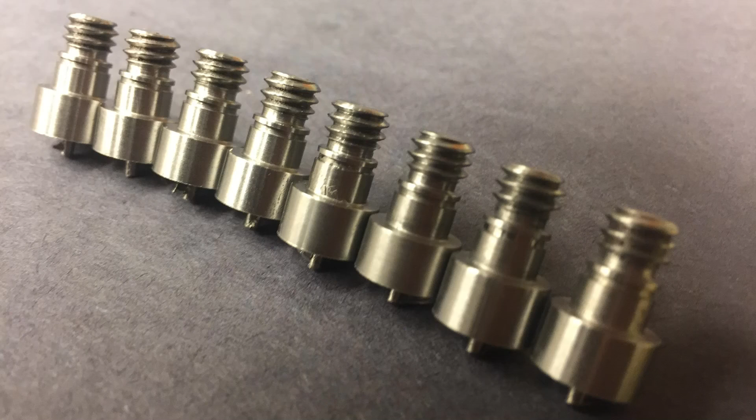So this is where we left off on the first video. Now we'll mill the slot and trim the head of the screw to length in the mill. Okay, we're going to use a collet chuck like this one, and we're going to put it in the vise here. I'm going to use a 1/4 inch collet to hold the part. It's a little bit hard to get these things in here.

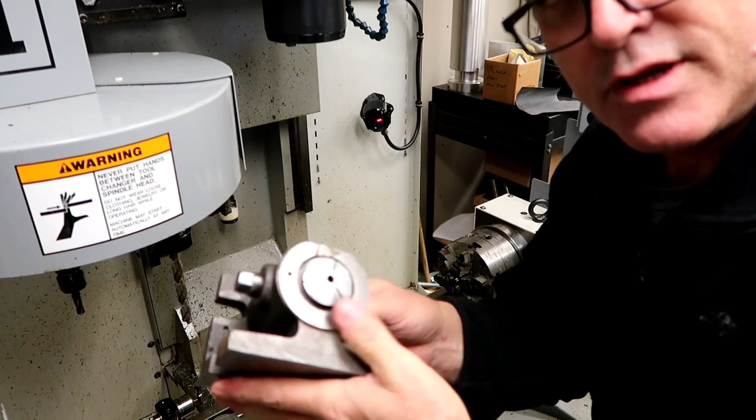This is what they call a dead length collet chuck. The collet doesn't actually get pulled back in this kind of chuck. I got to get a wrench that fits that, but the back of the collet chuck pushes forward, so the collet never changes its location. A normal collet chuck, like what I just used in the lathe, actually pulls the collet back to tighten it. This one actually pushes forward, so the collet doesn't move.

The inside sleeve moves to close the collet, which is kind of nicer because then the part doesn't shift back and forth due to diameter changes. Because if the diameter changes in a regular collet, and it pulls back further in the taper, it moves the collet in an axial direction. This can cause problems with the length of a part, or the shoulder or whatever it makes up on. So that's what we're going to use.

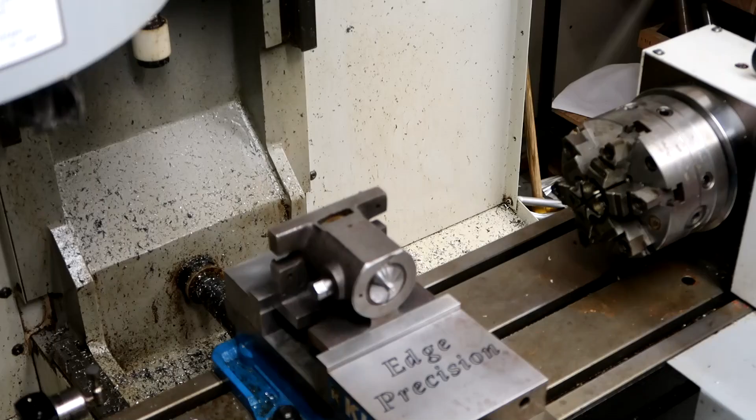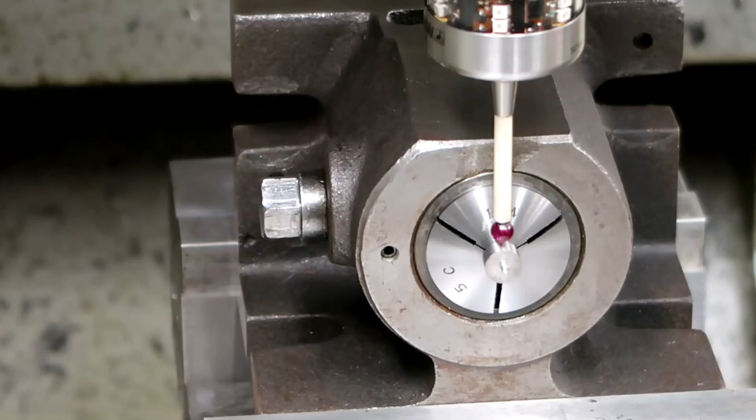We're going to stick it in the vise on parallels. I got to get the parallels out. Okay, we have the collet chuck in the vise on parallels, tapped down. Now we got to establish the part 0 of the part. We're going to probe the X and the Y and the Z for our fixture offset here on the machine. So I already got the program made here in the MDI.

Let's see how this works here. So first we're going to do the X axis. Let's start. Okay, now we got to jog it. Jog it down in Z a little bit so I can get the Y. Go Y, it should go to the plus side with this, if I did everything right. Okay, we gotta jog it back up for the Z here. Make sure it's on center line.

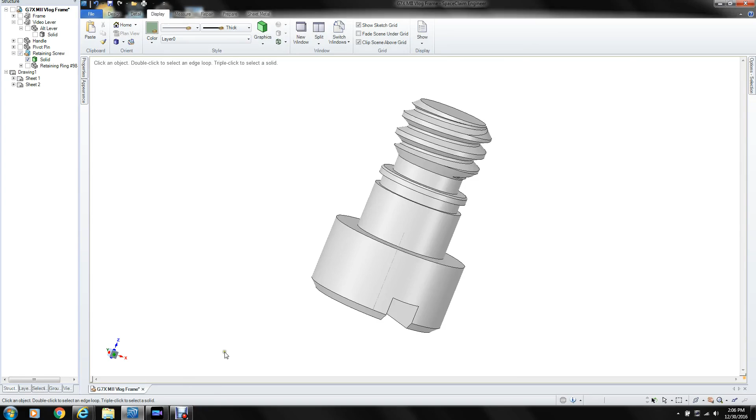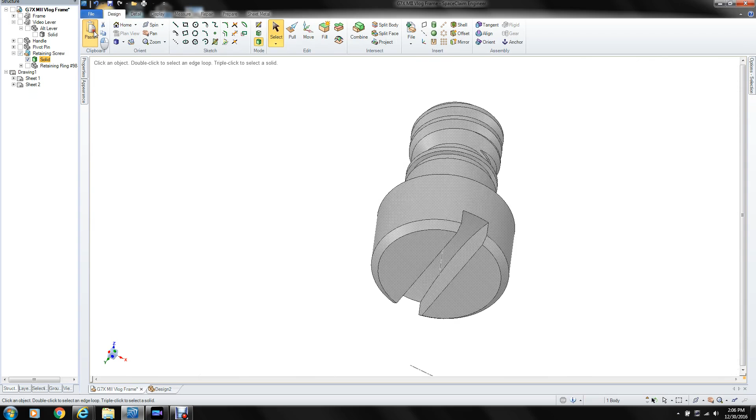Now we've got to go through actually making this little program to face the screw off and to cut the slot through it in this case. So first we got to get this in a position. We could position it in the CAM software, but it's easier to do it here. So what I usually do is go to a new design, and then I select this solid and copy it and then paste it in a new design so it doesn't change anything in my original model.

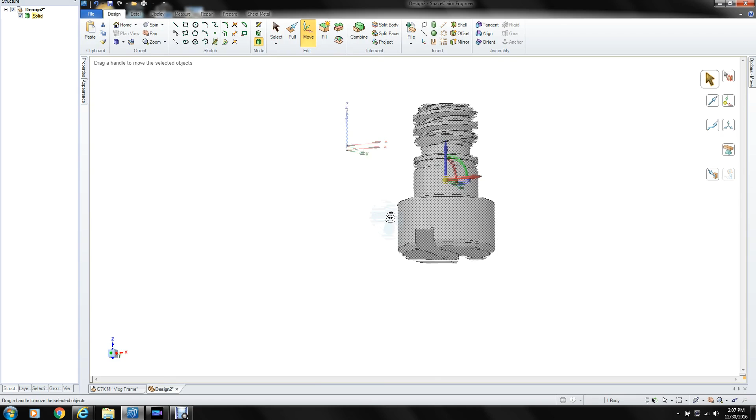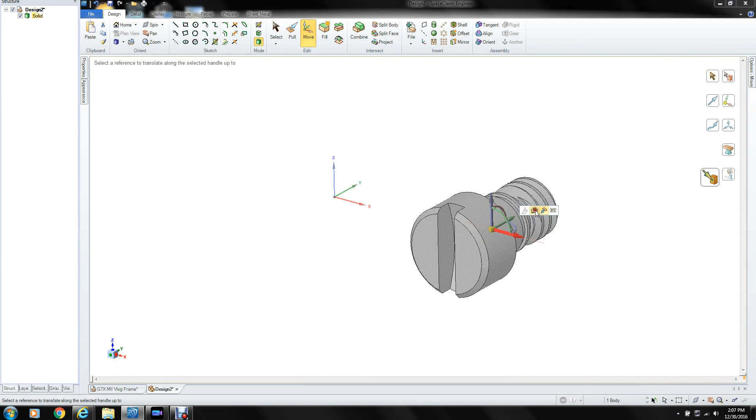And then I select the whole thing, and I want to move it. Well, actually, we have to rotate it -90 in this case, and then we got to position it. We'll select it again and we'll position this up to the Y0, and this center line up to the 0 point that way, and then we got to select the face as the point of origin for the movement, and then we got to bring it up to this point.

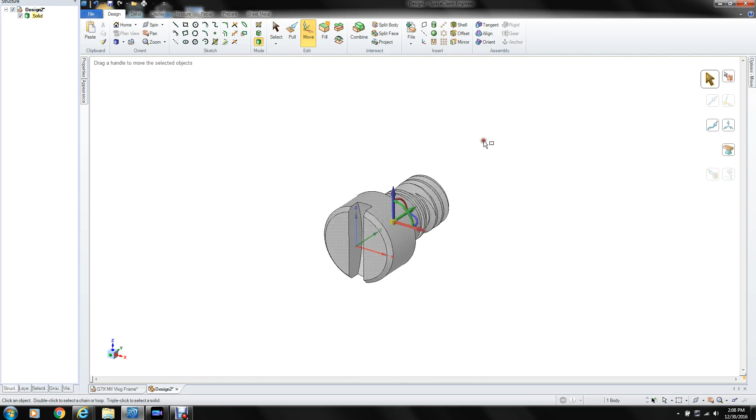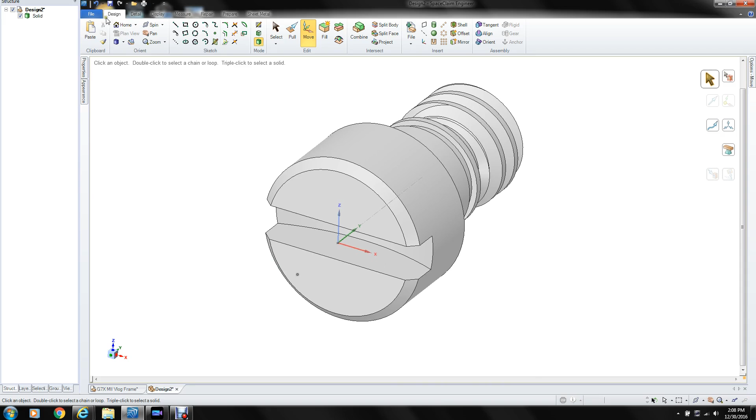Let's rotate it -90. So this is more or less the way we have it positioned on the machine right now, with our X axis pointing off to the right, the Y pointing to the back of the machine, and the Z upward. And now we can save it in a format that we can bring into the CAM software, which in this case is an ACIS format, and I got to save it where I want it. There. We'll just call it screw milling. Okay. Now we got it there.

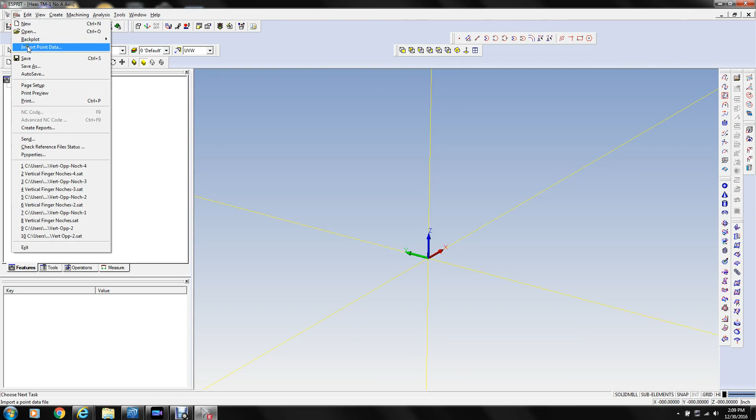Now we got to open up the CAM software, which is what I use. And this is the Haas TM1 template, I guess you call it. And then we got to open the file. What did I have it on? I had it on this Samsung drive. Okay, right here. So this is positioned just the way we want it already. Otherwise, you could position it here, but it's actually easier to do it in the CAD software.

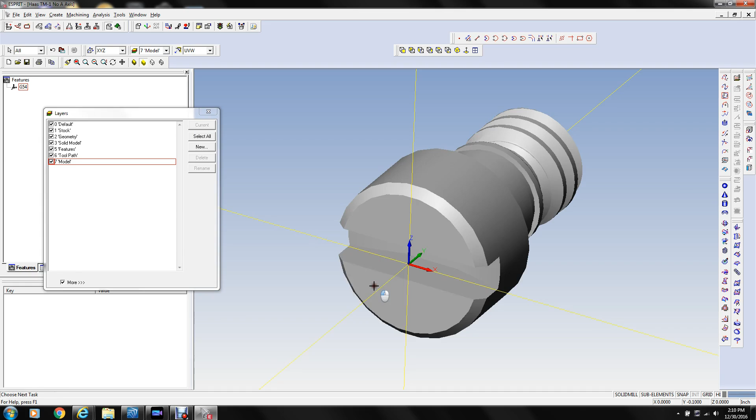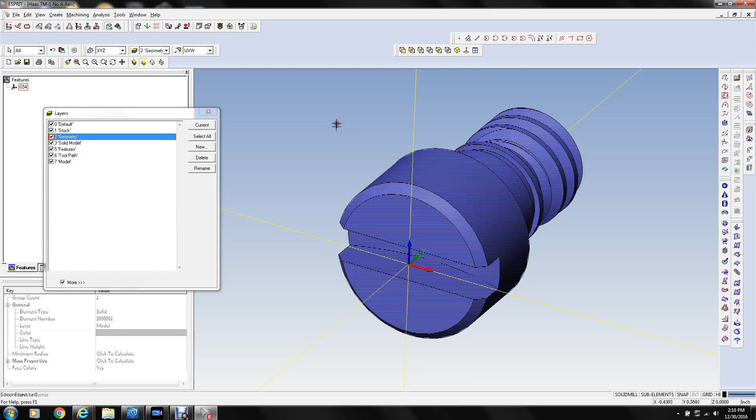So let's put this solid on a layer. I don't have a layer for that. Let's call it the model layer, and let's put the solid on there, just to organize things a little bit. And let's select the geometry and put some wireframe geometry on this. So we got to smash it in this software to wireframe like that. You could define it off the solid, but for this simple milling you can do it off the wireframe just as easily.

So we'll select this element here, and for our facing, we're just going to mill along the face of this with an end mill. So we'll select that, and we'll make a contour for that, or a chain they call it in this software. And then we'll select this, and we'll also make a chain on that segment. We'll name these SLOT for the slot, and this is the face, just so we can keep track of what we're doing here.

Okay, now we got to find some tools. End mill. We'll call it number 1 here, just for a description. 0.5, four flute, carbide. Call that number 1. Flood, we'll leave that alone for right now. Put it over here, 0.50, four flute, carbide.

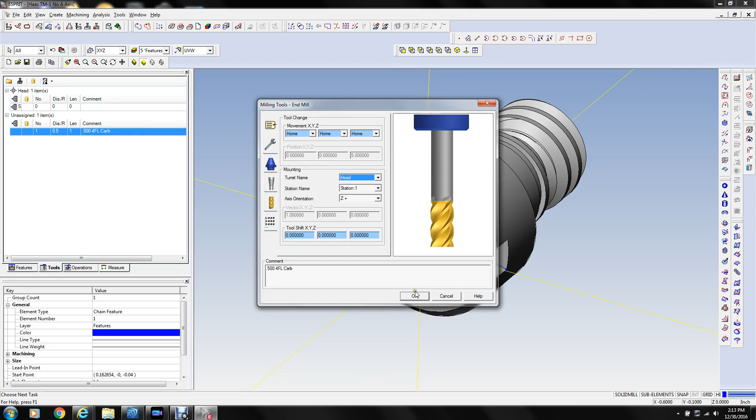Oh, we do have to mount it in the spindle. Okay, then new milling tools, we got a slot mill. We call this number 2, just for a description, 0.5 by 50 thousandths wide. Tool number 2, and we got 0.50 by 0.05 wide. We'll call it a woodruff. It's not really exactly a woodruff cutter, but we'll call it that.

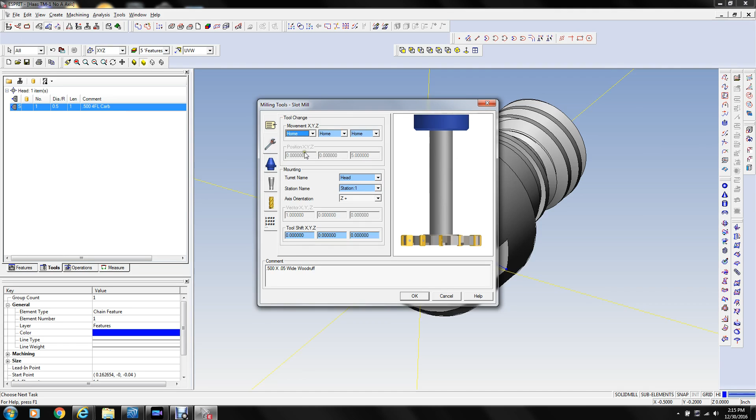0.5, 0.05 thickness, corner radius none, number of teeth, I don't know how many teeth that thing has. We'll say 8. I think it's got 8 teeth. Shank diameter is 240, and it's sticking out of the tool holder, oh, I don't know, 1.25, something like that. Just trying to keep this as simple as possible in order for it to do the machine work.

Now we're going to establish this facing cut. First we could define some stock here. I could have done that in the CAD software, drawn a piece of stock. Didn't do it, but we'll do it here. All we need is a simple cylinder, 0.1875. No, the inner radius 0, xy, y is, we'll call it minus 0.020, give it some stock, and the center there, and then we'll go 0 and x, 0.5, just to get it some stock. We don't care about the screw end of it because we're just machining this end.

And 0. Let's make it this color over. Let's select that color over there and add it. Let's just see if that looks like it's approximately where it's supposed to. Okay, that looks good. Now let's cut the face off. We're just going to take one cut across here. We're going to have to lower it down below this slot. We're just using that piece of geometry as our profile to program to.

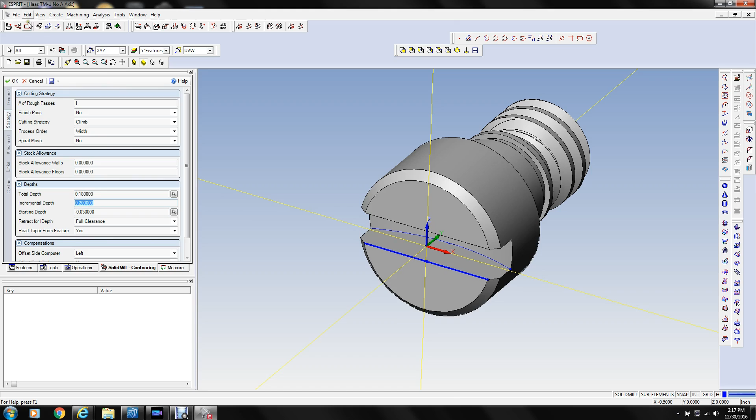We'll call this FINISH face. We'll select that tool, and we'll turn 3000 RPM and 0.002, 24 inches a minute. Plunge at 50. Plunge rate's not going to matter because we're not going to even do a plunge. We're going to rapid it down. Total depth of, we'll say 0.18, because we've got to go down deeper than the cut. Incremental depth, that doesn't matter. Starting depth, that doesn't really matter either.

And links, 1 inch clearance. I'm going to put a 2 inch because of that collet chuck on there, and we're going to rapid it down and feed over. And distance is alright here for the lead-in, 0.265. One thing we're going to do is check to make sure we're not going to offset the tool radius, but we are going to have left-hand cutter comp. And that's 50% of the cutter over.

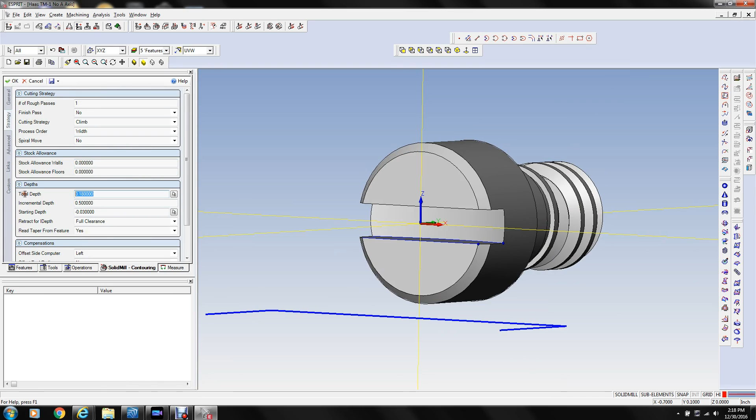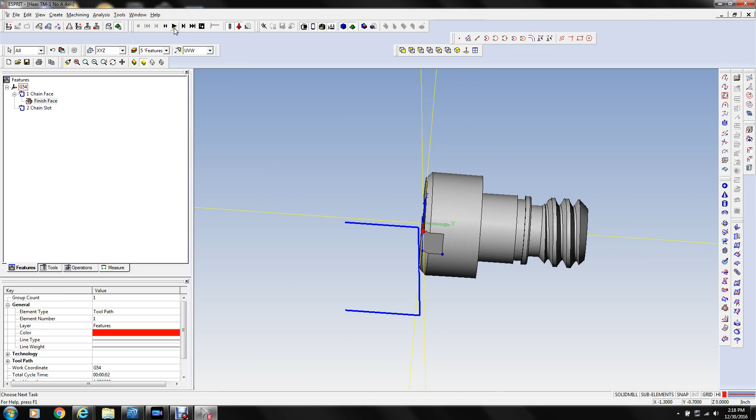Let's try that. Oh, we don't need 2 passes. What are we doing here? Oh, 0.5. Okay. We could probably do 0.150. Let's try that. That ought to be deep enough there. So let's just see what that looks like. Can't see it from there very well. Coming down over, face the end off. Okay. That's good. Now cut the slot. 50 thousandths, and this slot was 80 thousandths wide. So we could do it in 2 passes here.

So you gotta select that feature, and we gotta do a profiling cut, and then we're gonna select that tool. We'll still turn 3000 RPM. I'm going to go about 12 inches a minute here. The plunge feed rate's not going to matter because we're going to rapid it down. We're going to take 1 pass at it. It'll be good enough for this slot. But I'm going to set the start depth at 0.050 here. That's what we got to do right there.

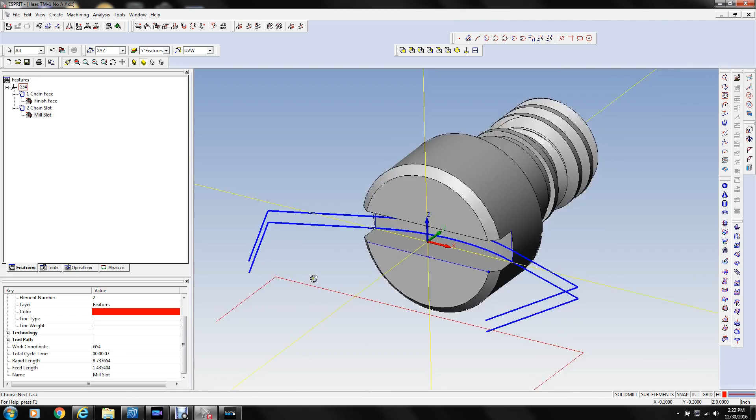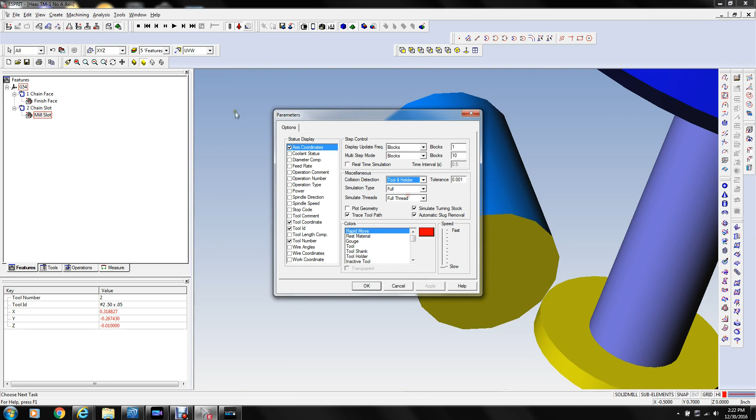Okay. So that should be our, and we'll have to see if this collides with the stock when we simulate it here. It might. No, it's pretty far away actually. Okay, that looks about right.

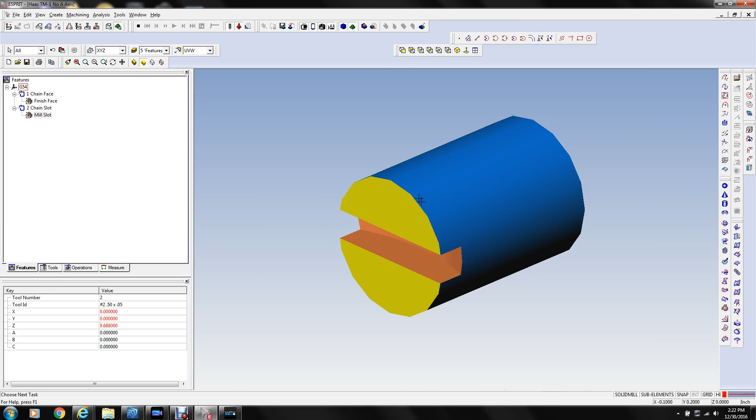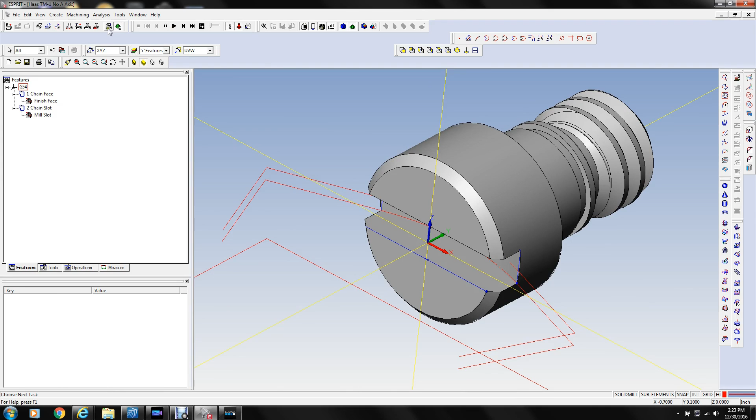So now, we're not going to cut the chamfer on here. I'm just going to deburr it. I guess I could have cut that on the lathe when I parted it off. Didn't really think about that. Put it in the program to cut that chamfer. For right now, we're just going to deburr it manually or something like that. Or we could put it back in the lathe and just knock a chamfer on it. That might be a way to go too. But this is all we're going to do right at the moment for this milling cycle. So now we got to figure out where we want to process code to. So process the code. It should be a relatively simple program.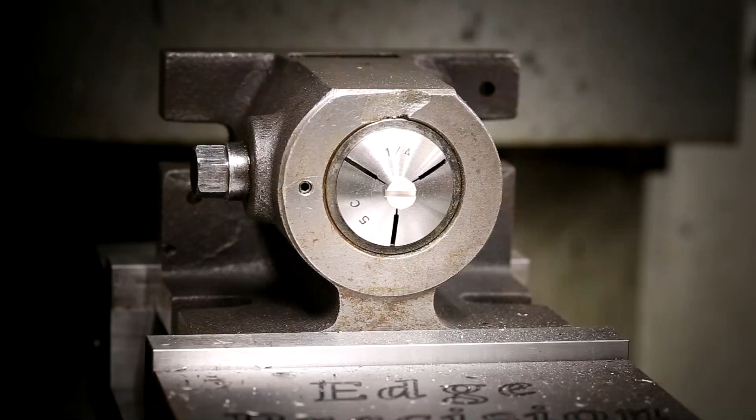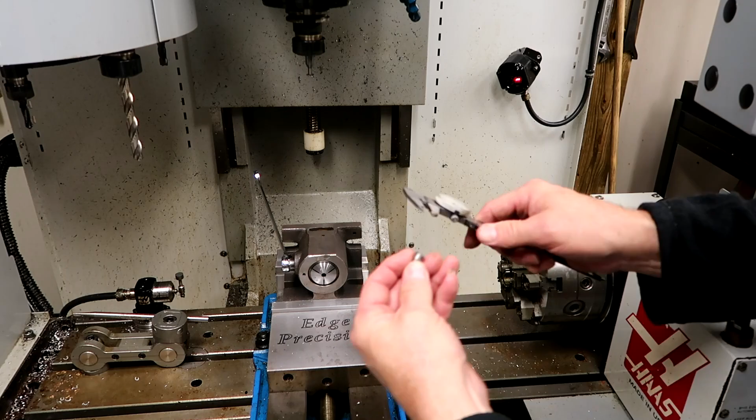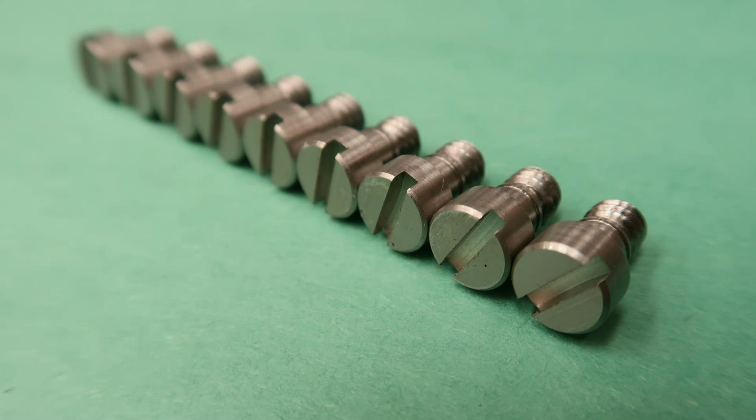See what we got going here. Kind of probably in the way of the camera here. So that's that. What we wanted to do is be able to sit this point in there and tighten it up, which it looks like it does. See how close we got to the center line? Should be 80 thousandths wide. Pretty close. Okay. Oh, and also the 200 thousandths long, right? 201. So all the parts are finished machined now. Cut the length. Slots milled. I went back to the lathe to chamfer the top corner to make it look nicer.